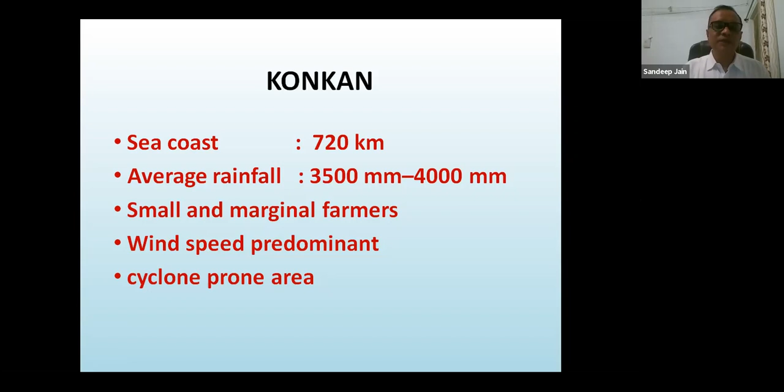Wind speed is predominant, and it is also a cyclone-prone area, because in the last 10 years 3 cyclones have come over here with speeds of 85 km per hour to 140 km per hour. Out of the world's total bamboo grown area, Asia contributes 65% of bamboo cultivation, and out of that 30% contribution is from India, and out of that Maharashtra has 10%. Bamboo is grown abundantly in the Konkan region.

Actually, bamboo is a renewable and very strong grass, having good strength and flexibility. But the problem with bamboo is it is attacked by fungus, beetles, termites, borers, and hence needs to be protected. Otherwise, within less than 1 year, it gets decayed and its strength is lost. It has very good tensile strength. Though steel has 6 times more tensile strength, bamboo can be used for rural housing and

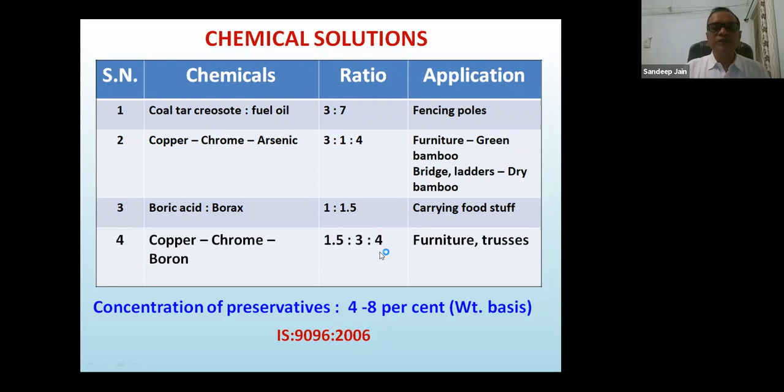other structures. Regarding chemical treatment, as per the IS code, these are the chemicals and their proportions given. For outdoor application, copper chrome boron, the fourth one, is very useful. It is not very costly, and has a good effect. In the earlier methods of preservation of bamboo, the traditional method for sap removal is to keep the bundle of bamboo in a flowing river.

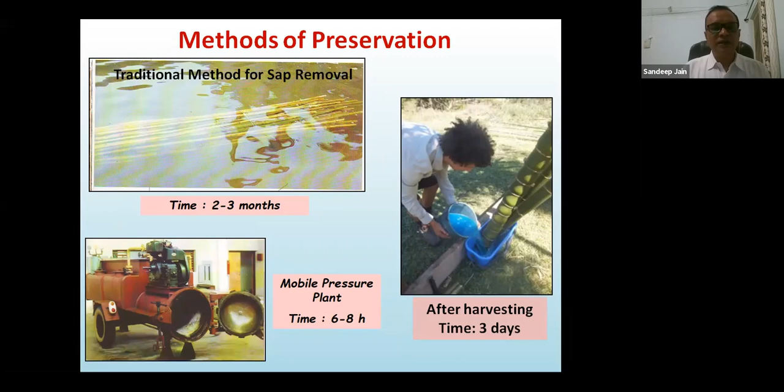Also, bamboo can be kept standing in the chemical so that it can suck the chemical. Nowadays, an 8 to 10 lakh rupee machine, a mobile pressure plant, is also available, in which 100 bamboos can be treated within 6 to 8 hours. We have developed this small machine which can treat 6 bamboos at a time of any length. These are the joints, and 1.5 kg per centimeter square pressure is required, and it takes 3 to 5 hours. As soon as the chemical starts dripping from the other end, the chemical treatment

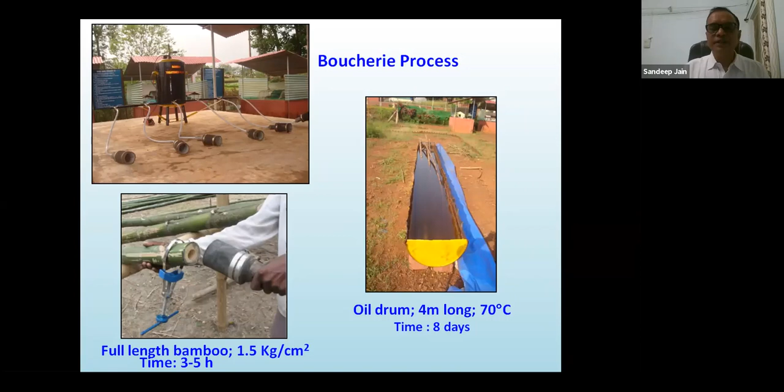process is over. For small farmers, an oil drum can be cut vertically and joined horizontally, in which 4-meter long bamboos can be treated. To enhance the process, we can give heat through electric heaters up to 70 degrees centigrade, and it takes around 8 days. Before dipping in the drum or a trench, we first have to drill it with a 3 mm drill below and above, on both sides of each and every internode, so that the chemical can reach every part.

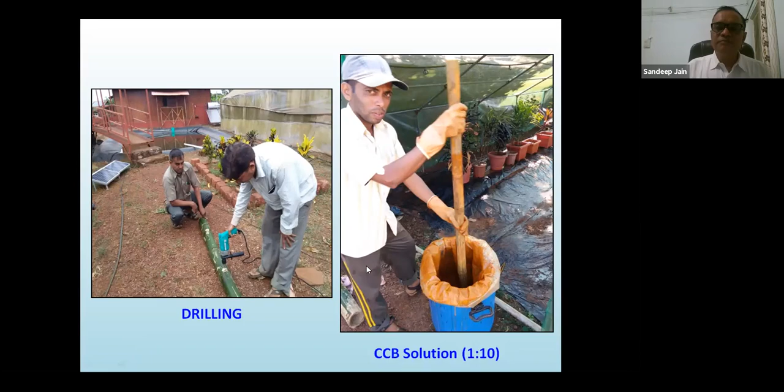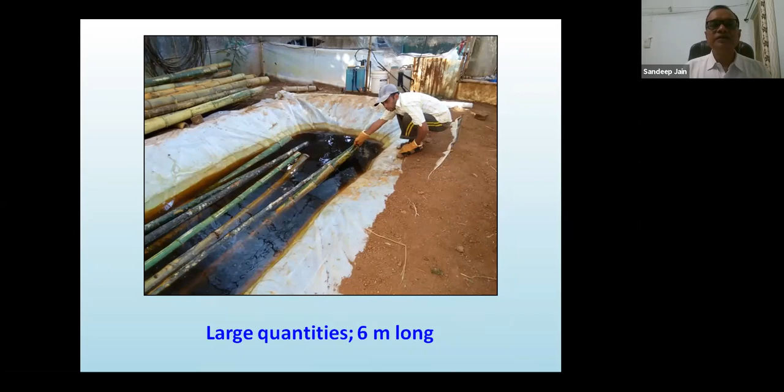This is the CCB solution, copper chrome boron solution. Earlier we used to purchase the three different chemicals and then mix them. But now it is readily available from an entrepreneur in Pune, in a ratio of 1:10. It is mixed with water, and a plastic-covered trench like this can be used, in which a large quantity of bamboos can be submerged for about 8 days, and in this way the treatment can be done. After treatment, the life of the bamboo increases from 10 to 30 years.

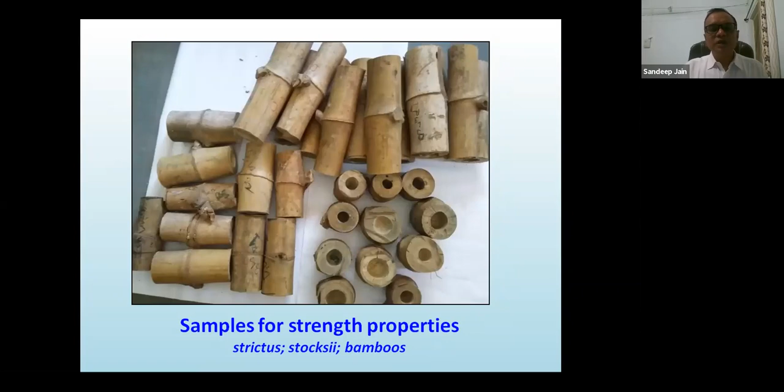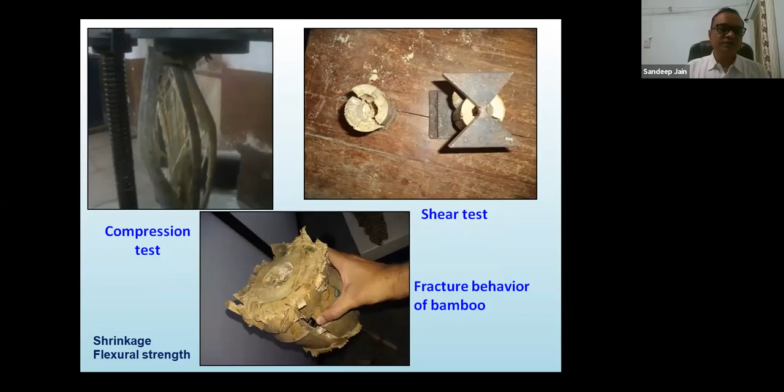Then, for the bamboos available abundantly in Konkan, like Dendrocalamus strictus, Dendrocalamus stocksii, and Bambusa bambos, we found out the different properties, like compression strength, shear strength, and fracture behavior. Then shrinkage was studied. The flexural strength was studied, and based on this whole study, we designed and developed bamboo polyhouses of about 8 meters by 24 meters, with a central height of 4.8 meters.

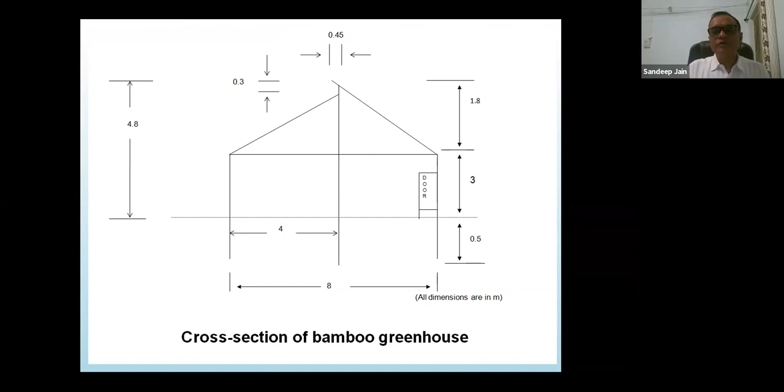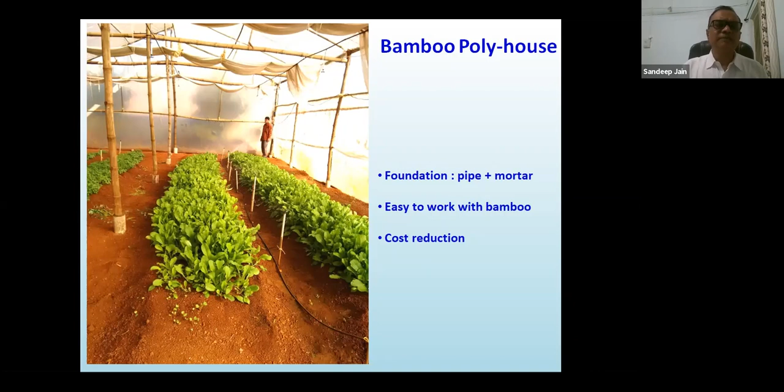Dead load, wind load, and live loads all were considered, and the design was made according to that. It is very easy to work with bamboo as compared to the GI pipes. Cost also reduces by 20%, and the rest of the things like plastic, zigzag spring, etc., are common.

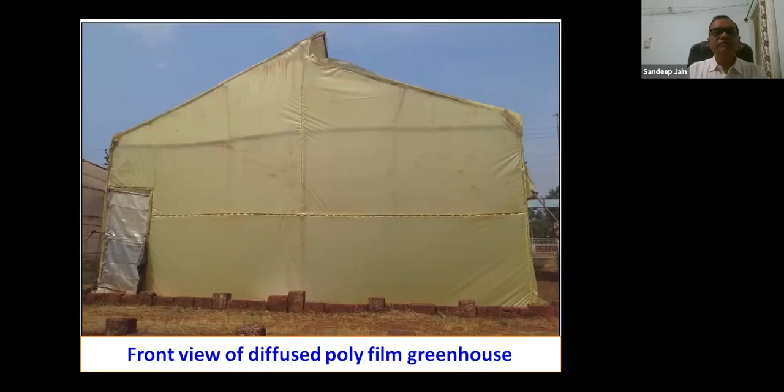Then two polyhouses were made of bamboo. One was covered with clear polyfilm having 200 micron thickness, and the other with diffused polyfilm having the same thickness, same area of 8 by 24 square meter. Temperature, humidity, and light intensity were observed at 9 places.

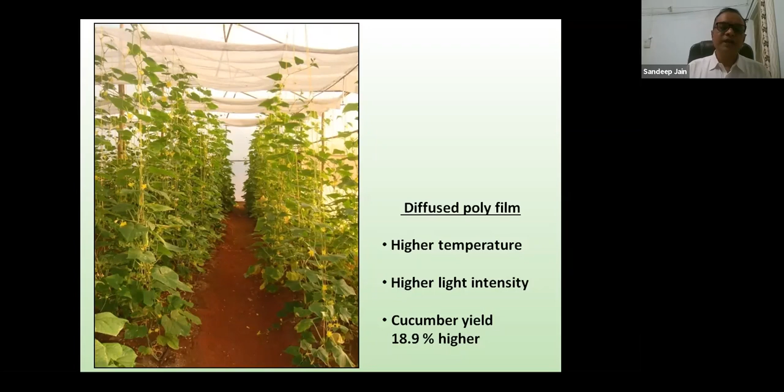After that, we have grown cucumber in that, and it was found that in the diffused polyfilm, because the sunlight reaches the lower portion of the plant, higher temperature was observed, higher light intensity was observed, and also cucumber yield was 18.9% higher than that of the clear polyfilm. These are a few pictures.

Then on the basis of that, bamboo shade net houses were developed and given to the horticulture department. One workshop was also arranged on this, and a few trainings were done for the farmers to teach them how to make the joints of bamboo and how to treat them.

After that, in the same line, the university has provided some funds to erect bamboo houses to promote agro-tourism, and the farmer can build these bamboo houses in their fields as per their capacity, and it was done fully by our department.

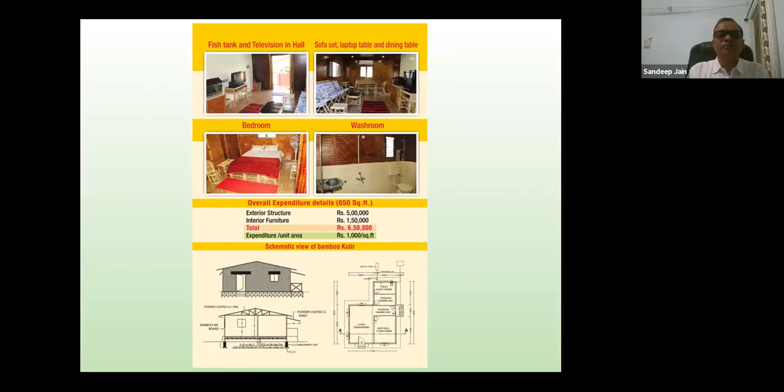For a bamboo house of 650 square feet, the exterior structure cost came to 5 lakhs, and for the interior furniture, cane furniture was there. It came around 1,50,000. So total expenditure per unit area was 1,000 per square feet. After successful completion of this one bamboo house, 3 more bamboo houses were erected and given to the university authorities.

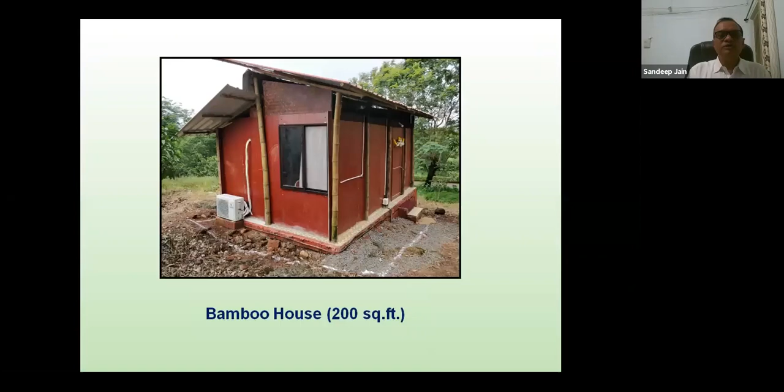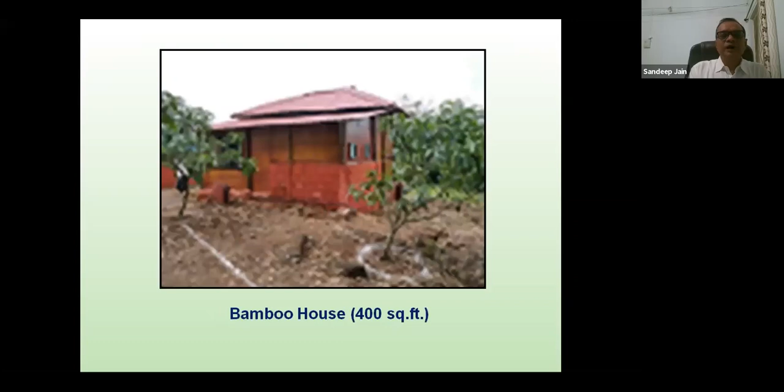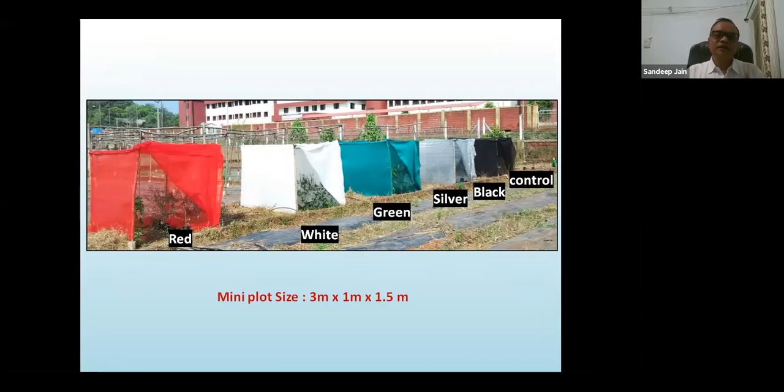Then some work was carried out on the colored shade nets. For that, mini plots of size 3 meter by 1 meter and a height of 1.5 meter were prepared, in which the colors of the shade nets were red, white, green, silver, black, and the control was in the open field. And in that we have grown 3 crops in pots only: tulsi, radish, and capsicum.

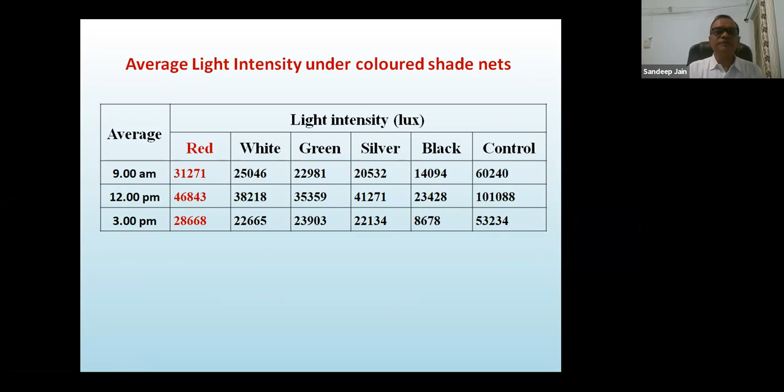We have found the red shade net has given better results regarding temperature; humidity was not having much effect, but regarding light intensity, it was having good results. Here we can see that for the tulsi, maximum number of secondary and tertiary branches were obtained under the red shade net, having the highest number of leaves also as compared to the other shade nets.

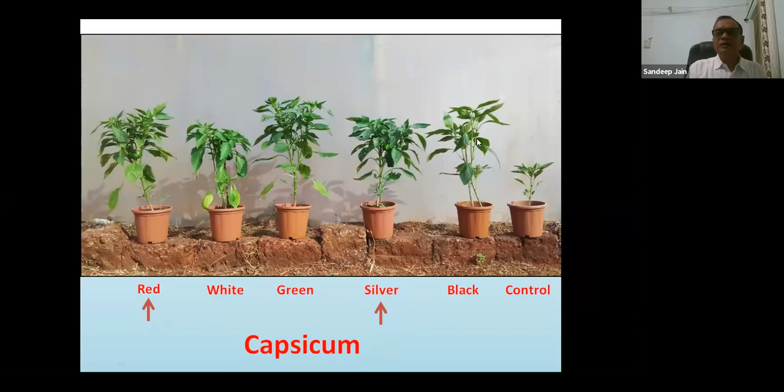Then for radish, we got better results in silver, having more weight, and it was followed by the red one. Then for capsicum, the red shade net has given good results, followed by the silver shade net. In other things, either the height was more, but fruiting was not there.

Then with the help of Syed sir and funded by ASPI, an automatic side curtain mechanism of a naturally ventilated greenhouse was developed. It is said that in Konkan, natural greenhouse conditions are there, and that's why mechanical devices are not required. And hence, for naturally ventilated conditions, we used to open the side curtains in the morning and close them in the evening. But during daytime also the weather changes, and that's why for precise farming, this project was undertaken.

The farmer won't be able to do this continuously in daytime, and hence such an arrangement was made with the help of roller pipes, a motor, and a microcontroller, so that the microcontroller takes signals from the sensor giving the temperature reading, with the optimum temperature range for the crop set at 28 degrees centigrade to 32 degrees centigrade. When it reaches 32 degrees centigrade, it will open, and when it reaches 28 degrees centigrade, it will again close the side curtains.

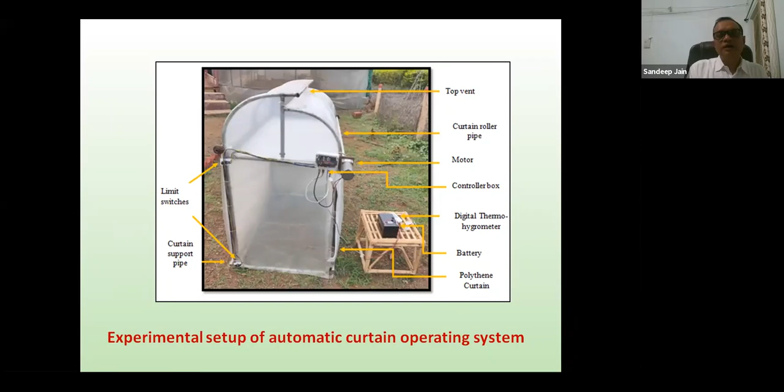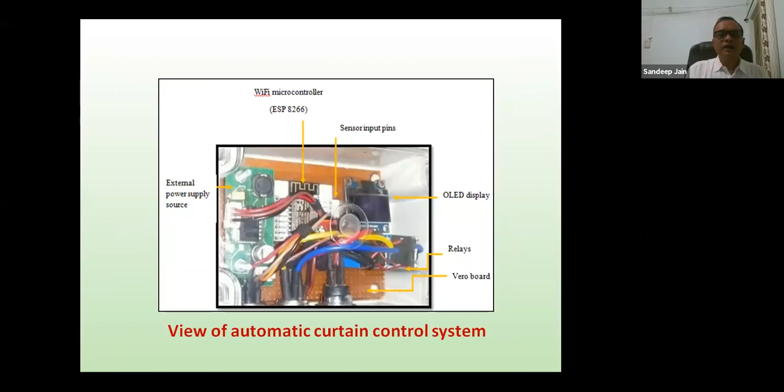On both the longer sides, the curtains were closed and opened simultaneously. The mechanical system was developed with the help of bevel gears and roller pipes. And here is the microcontroller which senses, and it also works from the internet. The arrangement was made by Syed sir so that we can also operate it from our mobile.

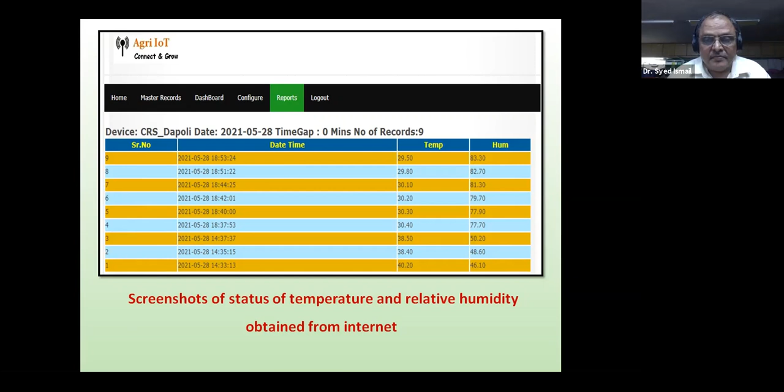Dr. Sandeep, can you wind up a little bit fast? Yes. We are running out of time, and here is the video of that. Shall I show it? We have less time. Okay.

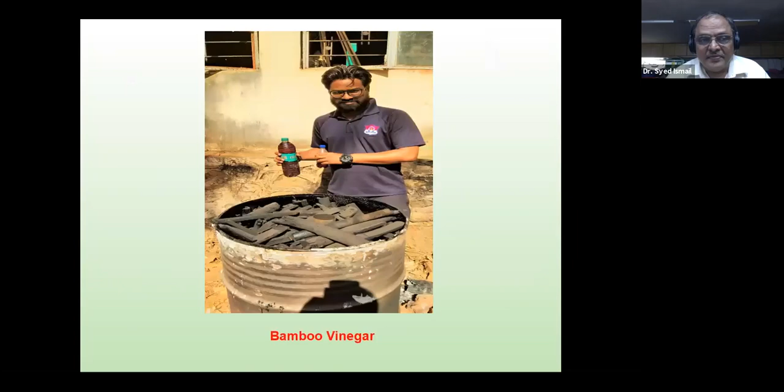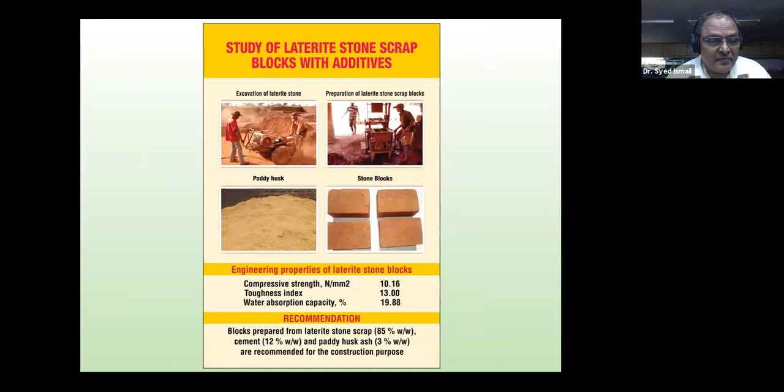Then other technologies developed by the department were making of bamboo vinegar and charcoal. Then use of lateritic stone scrap, obtained from the quarries of lateritic stone, has been recommended. Then concrete floor and rubber mat floor have given different effects, about 14% hike in milk production, and also comfort in sitting and standing of the cow.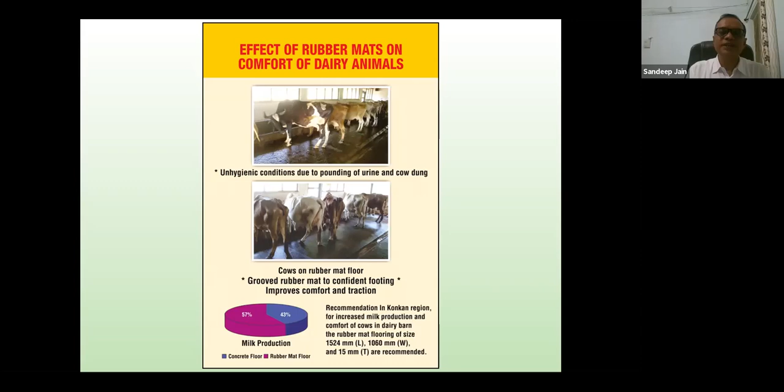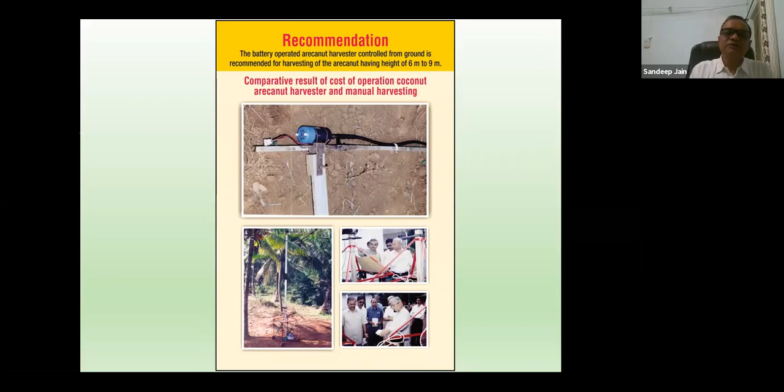Then work was carried out on bamboo mat board. Then in early 2002, work was carried out on an areca coconut harvester, with which we can harvest from ground control. Thank you, sir.

Thank you very much, Sandeep. It's very interesting to see that with bamboo you can make polyhouse structures. And I think you told me about 20% of price is reduced. But I think not using steel and using bamboo gives much more value.